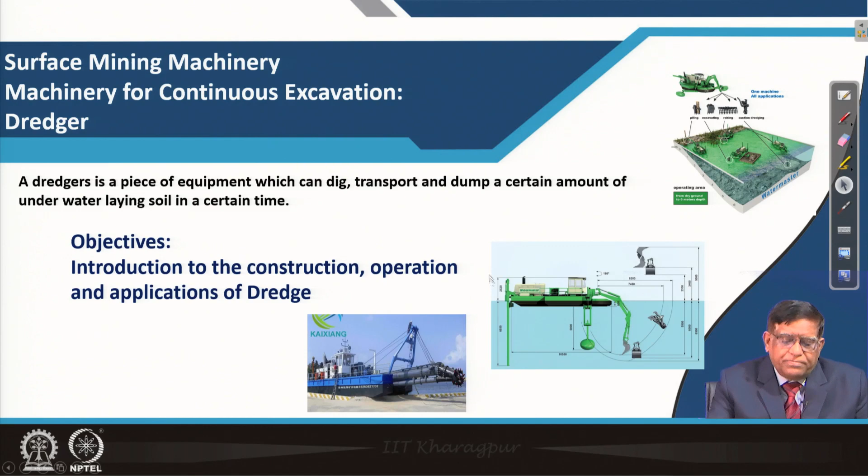These machines were very much used while the Suez Canal was formed at that time. So it is also an old machine used for underwater excavations.

After going through this lecture, you should be able to explain the construction, operation, and maintenance aspects of these dredge machines, and also identify the applicability - where you apply them, for what purposes, and what are the advantages and disadvantages of different types of dredge you can discuss.

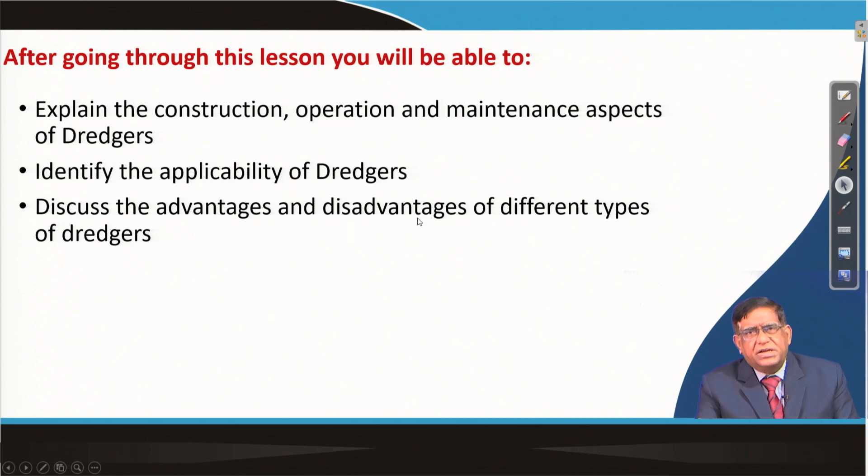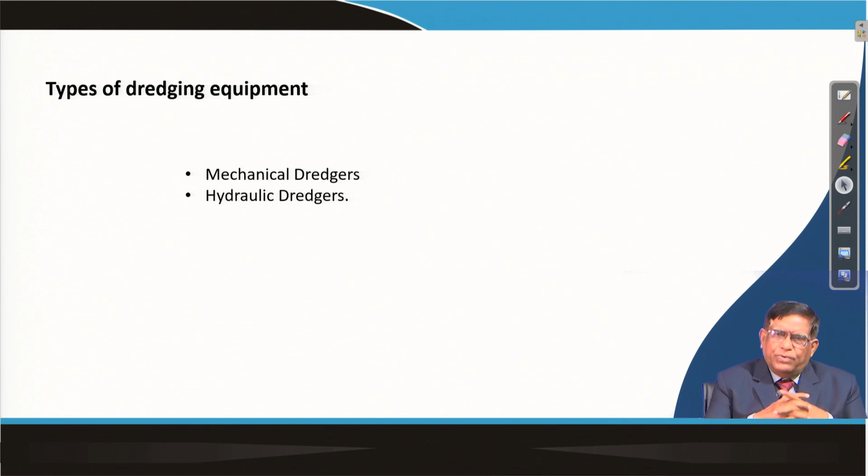So with these objectives, let us see - if you talk about the types of this dredging machine, there are two main types: one is the mechanical dredger, another is the hydraulic dredger. Now if you think of this mechanical dredger, it has got the bucket ladder dredge, or it has got the grab dredge and dipper and backhoe dredge.

The photograph which I showed in the first slide is a backhoe dredge, or it can be a grab dredge. Sometimes grab bucket excavators are used in this type, even for ship unloading they use this type of machine. And this bucket ladder dredge is similar to the bucket chain excavator we have studied - that can be used here too.

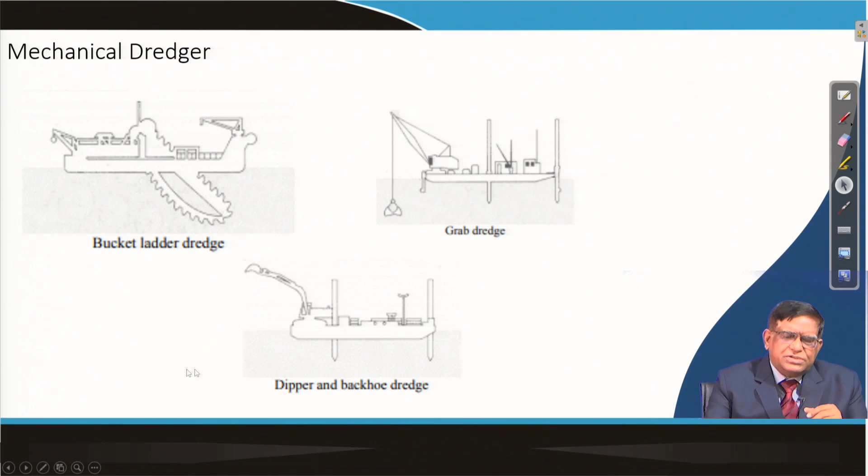But in dredging operations, many of them use the hydraulic dredge. This hydraulic dredge can be a plain suction dredge - from below underwater, the material is exactly sucked through this, and then through a pipeline as a slurry form, it is taken over there. From the slurry, you can separate the solid part by filtering, and the liquid part can be removed. There is also a suction hopper dredge on a ship, where the dredging units are attached. There is a cutter dredge, which is very commonly used - they have got a cutter head suction dredge.

Now these hydraulic dredges include dredging equipment that makes use of centrifugal pumps. If it is a slurry which is to be sucked, the pumping from the bottom is done by centrifugal pumps, and then the material will be transported through a pipeline.

So there is a cutter suction dredge, exactly called a hydraulic dredge. They are in a mechanical hydraulic category of machines, and they have the capability of cutting all types of soils - sand, clay, or rock - because the cutter head will be mechanically loosening the rock.

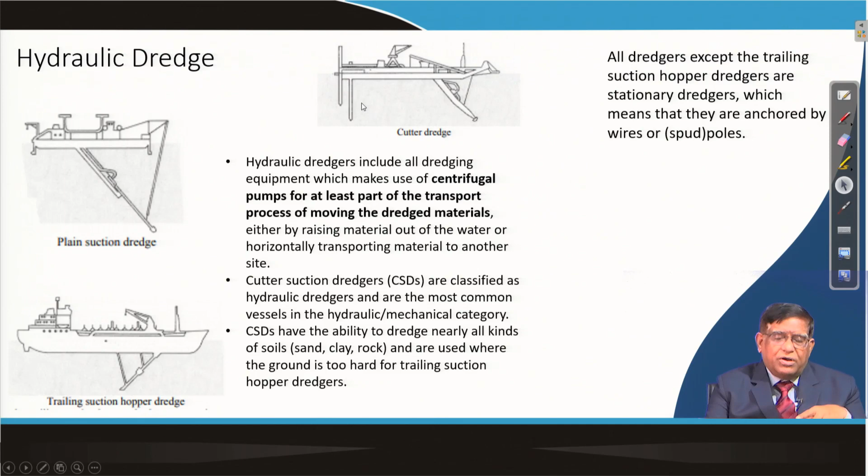There are different types of these dredgers available. These photographs give you a picture of how you can see a ship on which you are having a ladder, and at the bottom of it we have the cutting head. This cutting head will be loosening the rock mass, and the ladder can swing between this range - that means this much part it will be cutting.

There is a spud by which it will be anchored, so this machine during cutting is stationary. After that, whatever the reach of this can exactly be, this ladder can move this way and that way, and it can give rotation this way and that way. So by standing in one position it can cut one block.

After that block is cut, the spuds will be removed, and then the ship will be moving forward and cut like that. This cut material will be pumped and brought to the barge, where there will be a filter unit where the material will be filtered.

There is a crane for maintenance and other operations going on. So that's exactly how a dredge or dredging machine works. This operation is not real surface mining, it is underwater mining, but definitely it is not underground mining. That is why this machinery is kept under the category of continuous surface mining machinery.

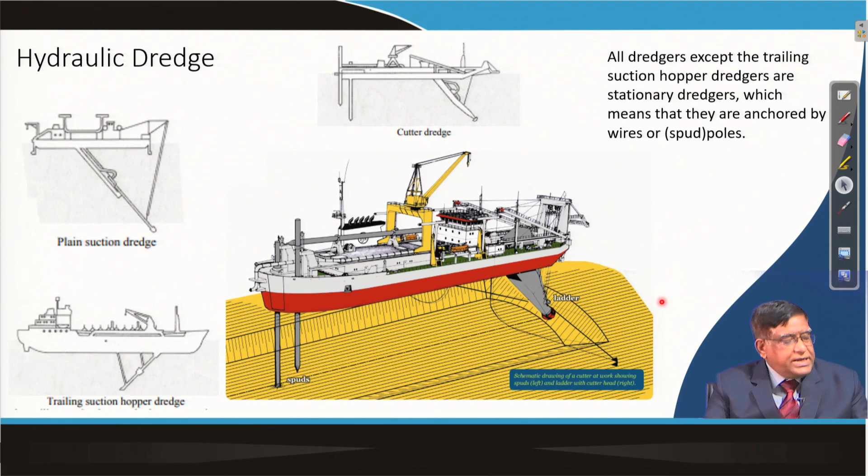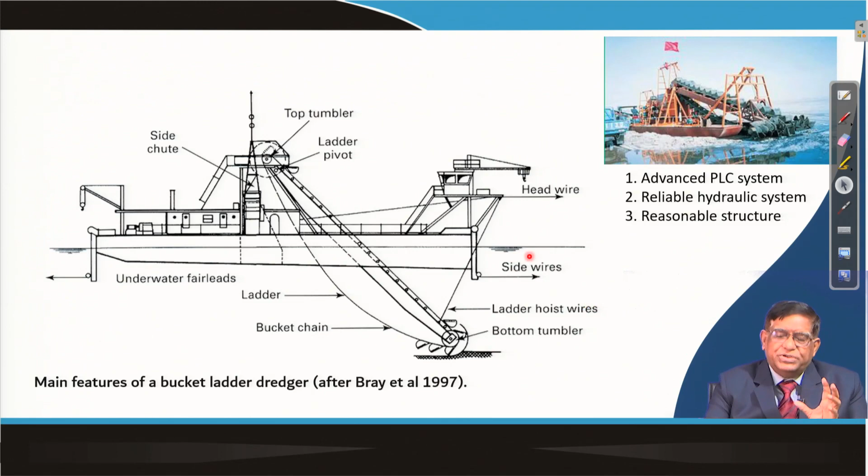Now, constructionally, these machines also have a mining system. As you have seen, it will have a ladder and a cutter head that will be doing the mining operations, and depending on the type of mineral, how they will be cutting, you will have to select the equipment, and there the mine selecting means you will have to separate it out.

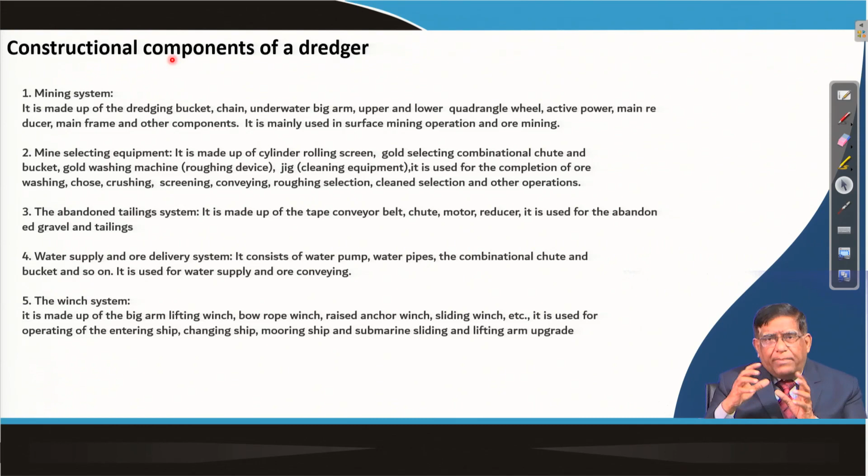After the cut material is brought to the ship where this dredge is, you may require to crush and grind it so that really the gold or copper that is there can be found, because they will be mixing in somewhere, hiding in between some rock. So you will have to crush and grind, then beneficiate - that is, remove the gangue material - and then the main mineralized particle will be poured and stored, and can be transported to another ship or barge that will take the material to the shore, or wherever it will have to be used.

Now, the tailings - that means on that ship itself, when you are dredging the material, say mainly in the South Pacific Ocean, you have got a lot of shallow depth, and also there are a lot of copper and gold rich seabeds there.

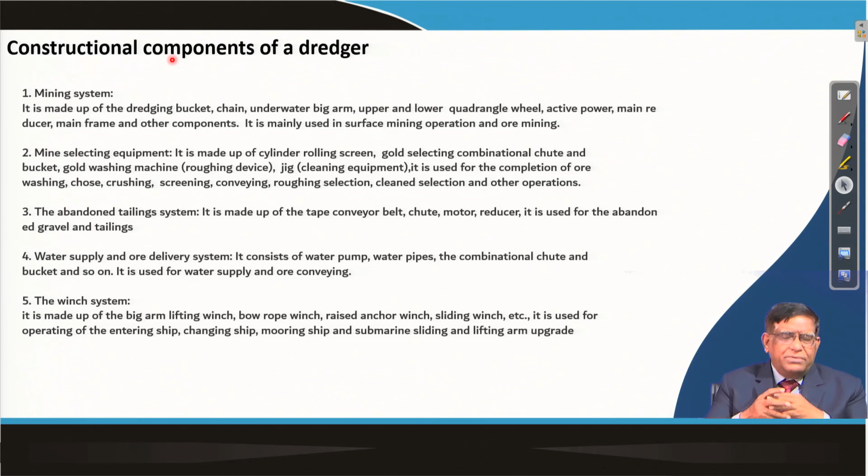There the seabed mining is done by this type of dredging, and then when they process it, sometimes for separating the gold, you may use cyanide or mercury, and those contaminated things along with the tailings, their disposal is a big problem. Sometimes they can be stored and taken out somewhere, or they will just be discarded into the sea. For discarding, there will have to be a chute, or a small short conveyor belt, or through a slurry pump through a pipe it will be transported. So depending on the situation, the components of that system will have to be there.

Now, there will also be water taken from underwater, and they will make it into slurry form, and then it will be moving. After the deslurrification, that water will again be discarded over there. Then there will also be, in the machine, some winch systems. That winch will control the raising and lowering of the ladder, and also the ship mooring operations, many times that will be there. That is why in the machines you have seen there will be an overhead crane also, so that maintenance and other movement can be done.

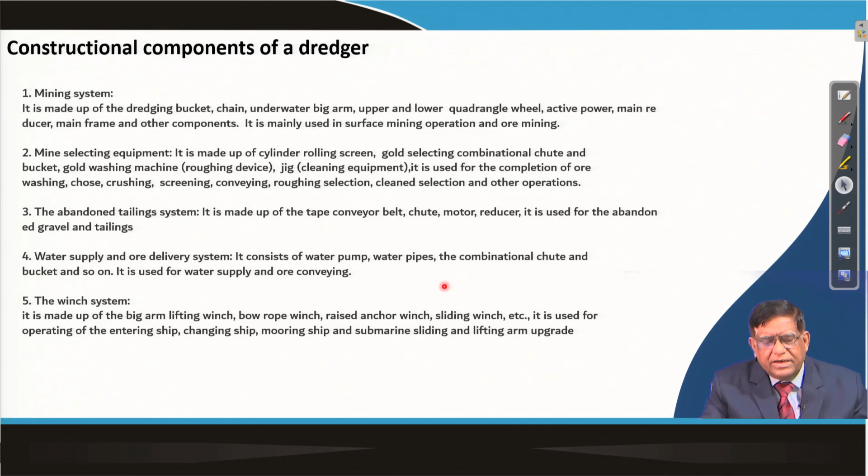Now let us see in this type of bucket ladder dredge how the components are. The main bucket ladder, this is the ladder on which the chain is there, on which the buckets are mounted. These buckets are cutting and then carrying the material over here. Now you can see the next component, a hoisting and lowering mechanism for the bucket ladder. This bucket ladder is hoisted and lowered by either a rope winch or hydraulic systems.

Then there is a drive for the hoisting and lowering system. That means this hoisting and lowering will have to be done by a drive, whether you take the power from an electric motor or from diesel engines. About 110 to 170 HP diesel engines will have to be here. From there you make the whole bucket raise and lower.

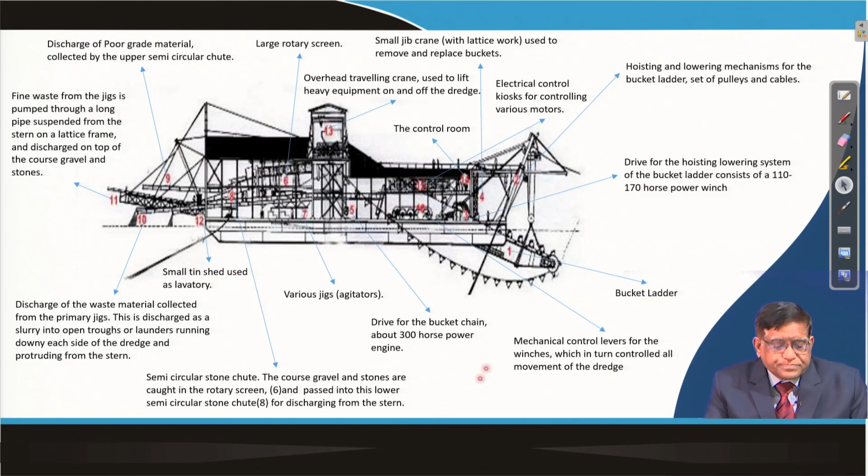Then there will be a small crane here, so that for bucket replacement, they can take out the bucket and put it somewhere, for maintenance purposes. A crane operation is there, and there is a control room which will be working over here. Then there is a drive for the bucket chain, which will have to be driven. There is a drive motor here which will run the sprocket on which this chain will be moving, collecting and transporting the material.

And then for the processing purposes, there are different jigs in the machine itself, so that the mineral can be processed over there. There is also a large rotary screen by which this mineral processing will be carried out. There is also one overhead crane here for heavy equipment lifting and other purposes. And then you can see there is a stone chute by which the material will be loaded for the discharge purposes.

So for the discharge, the waste material is collected from these jigs, and then it will be exactly discarded to the sea, or it can be taken out away from there. These are the things where you can see the discharge of the material taking place. And the fine waste of the jig is also pumped through a long pipe, which is also given over here. So thus this machine has got various components.

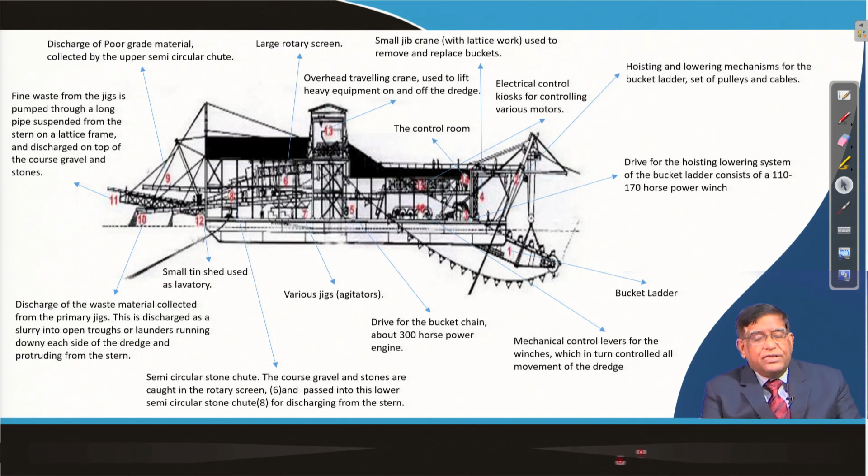So in this suction dredger, a mixture of solid and water is passed through a solid handling centrifugal pump. That pump is a special pump which is also called a slurry pump, and they have to take care that its impeller and blades should not get worn out by the chips, and also that the environment should not be acidic.

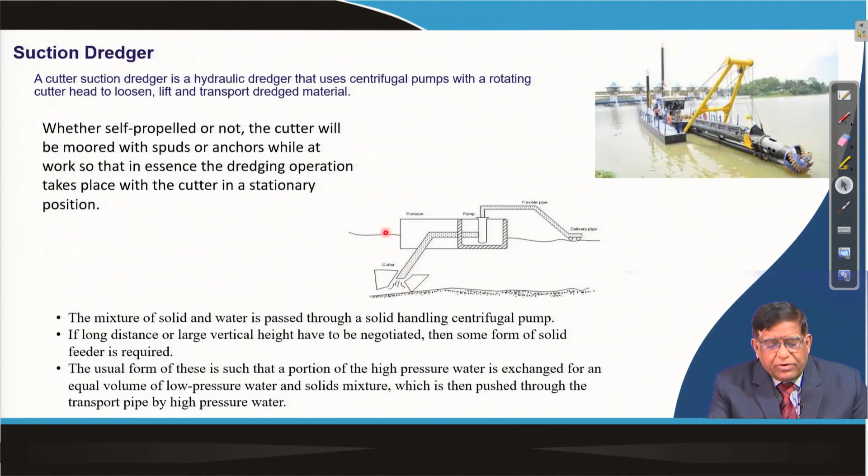If the pH value of the water goes low when making slurry from certain rocks, then pump maintenance will be a big problem. So these things are seen, and exactly how much it will be lifted depends on the depth, and we will have to design the system accordingly. That is very important.

Dredging in hard soil will cause wear and tear, so the cutter head needs to be replaced regularly. Mind it, under such conditions, this replacement and maintenance is a very skilled job, so that is exactly where you need to learn and study.

If you are thinking of working here, for example, Indian Rare Earths has a number of dredges. If you have interest in these machines, you can get job opportunities in the Port Trust of India, since dredging is also required for maintaining the ports.

Other than that, there were some dredgers. One was purchased for dredging the Brahmaputra river for flood management, but they could not use it, so ultimately it was sent to the Kutch coastal area for coastal preparations. This has tremendous use in our country if we think of river linking and river navigation, where river bed management and maintenance through dredging will be very much necessary.

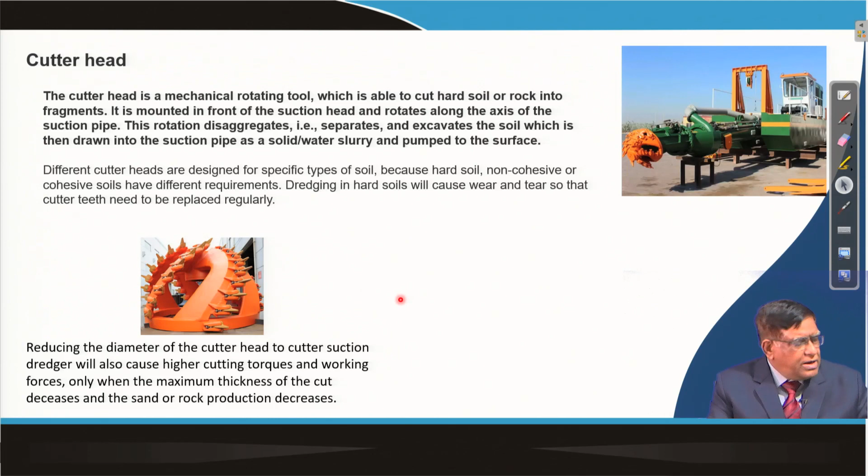In sand mining, some smaller versions of these machines are working, but what you need to know is that the cutter head speed and the pump capacity will depend on the cutter diameter. So if you want to optimize performance on these machines, these parameters need to be correlated. That is a separate study.

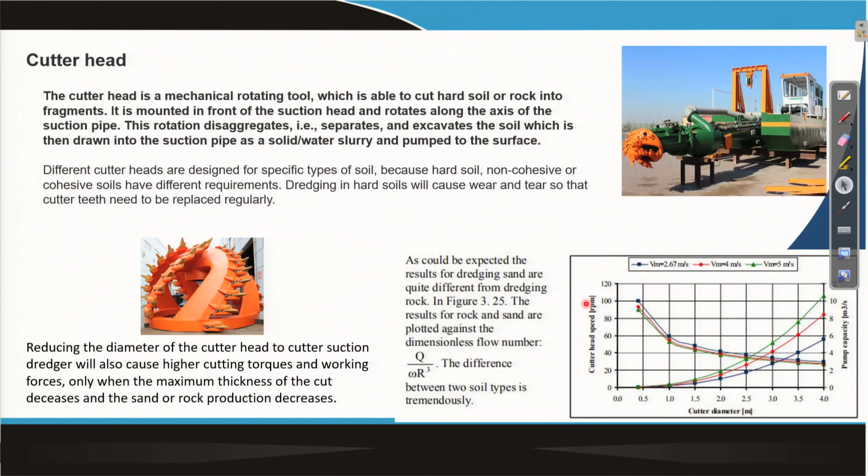If any of you want to take up small mini projects, you can start working on these particular aspects, how to optimize the production capacity by matching the diameter and the pump. Actually, that is one area where a lot of work and research is carried out.

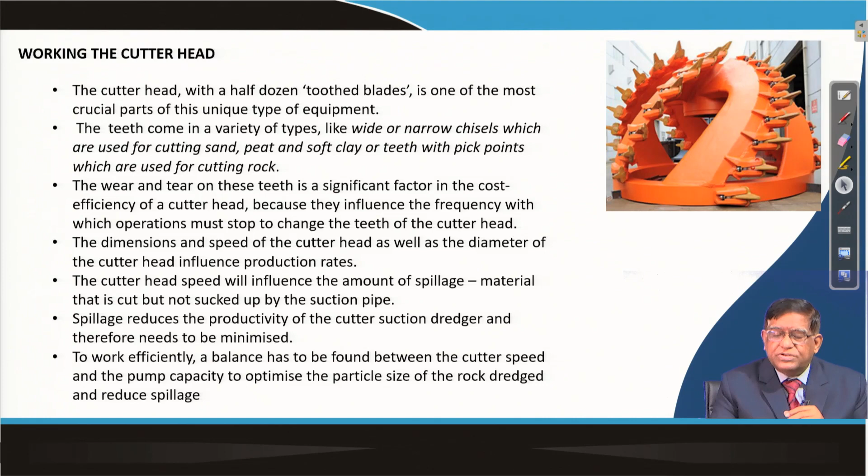Now, how does the cutter head exactly work? It has toothed blades, sometimes called toothed blades, picks, or cutting edges. These need to be replaced and maintained.

It is just like a chisel type of bit, so it can cut sand, peat, or soft clay teeth. If very hard rock comes, they get damaged. Then the wear and tear of this teeth is a significant factor in the cost efficiency of the cutter head. If the teeth fail very frequently, your downtime increases, productivity decreases, and cost of operations increases.

So that is why you have to be very careful in selecting the dimension and speed of the cutter head, as well as the diameter, since these influence production rates. Now, how does it do this?

It can be easily studied by first making a mathematical model of it, and then, if anyone is interested, you can make a physical model and do an experimental study of how a cutter head will perform. A small scale design can be made in the laboratory, and similar things can be fabricated and produced.

That type of attempt must come out from young engineers like you.

Now, the cutter head speed will influence the amount of spillage. What should be the spacing, and how will spillage take place? Material will go out and not reach the pumping area, it will not get pumped, it will spill out. So how will you control that? To do that control, how will the data be collected from there? Nowadays, everybody talks of machine learning and artificial intelligence.

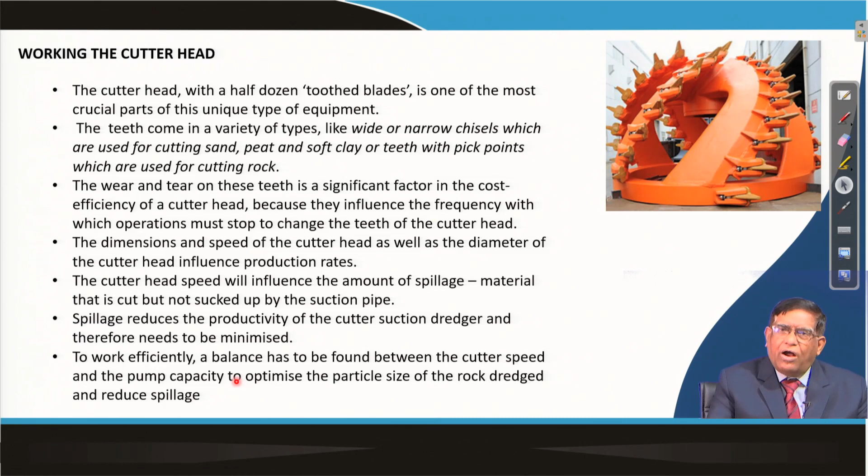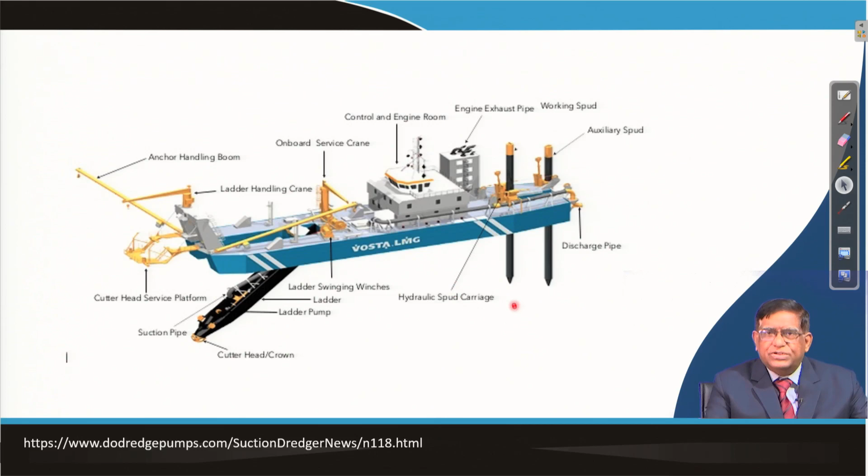Now you can see this type of machine where it is working, the cutter head services. I have shown you this machine in real life, you can imagine how the machine works with this figure. Now, cutter suction dredgers - the working principle is that it disintegrates or breaks the cohesion of the soil to be dredged mechanically by a rotating cutter head.

There, exactly, is the principle in rock mechanics - you have studied about rock properties, but how the dynamics of rock cutting works and how this will be breaking - that is exactly where the design of how you will be fixing the different cutters onto the cutting head comes in.

This is a very important study. The suction tube and the cutter head are attached to the so-called ladder. With the ladder, the cutter head is positioned at the fore of the vessel. In the front, you can place it.

Now, how do operations begin? The ladder is lowered under the water, then the pumps are started and the cutter head is set into motion. This is the sequence of working, and then the ladder will be lowered down until it touches the sea bed or the underwater bed where you want to do the cutting.

Then it reaches the maximum depth. This ladder length could depend on how your pump is designed. Sometimes if one pump does not suffice, you will have to have a booster pump, and that ladder length can be made flexible or telescopic, so that you can work at an undulated bathymetry of the river bed.

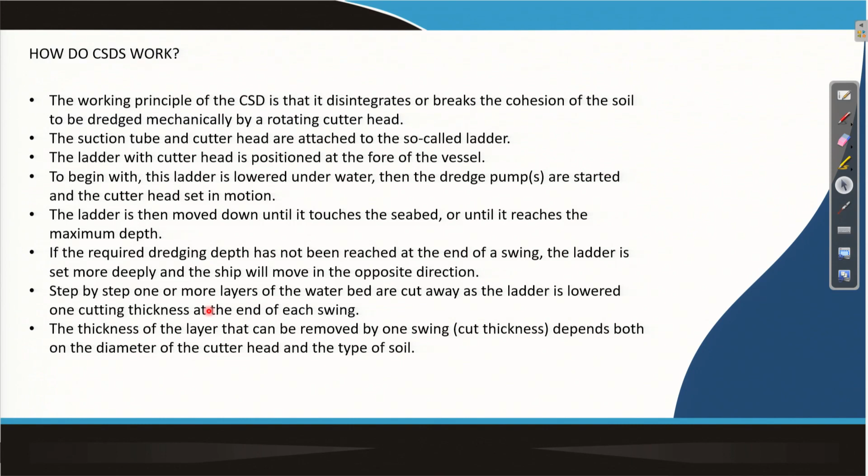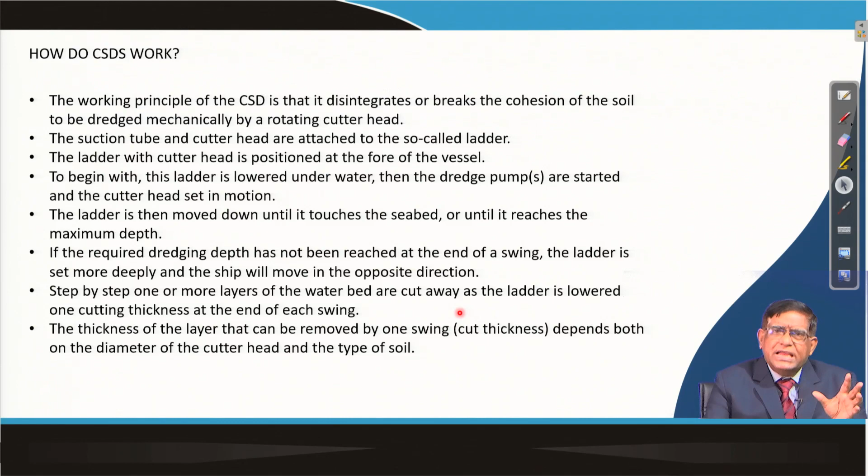It will be swinging down from right to left, and also it will be lowered, and then the angle of the ladder with the ship will be controlled, so you can reach particular measurements. The thickness of the layer that can be removed by one swing depends on both the diameter of the cutter head and the type of soil. The machine parameters and site conditions need to be matched here.

Depending on the type of material, you will have to select the cutter head. Different cutter heads are designed for different types of soil - for hard soil, non-cohesive soil, cohesive soil, they have different requirements. For hard soil, the cutter head should be used so that it can withstand the impact forces on its teeth, because with hard rock the impact will be more, and you will have to withstand that.

It should be heavy, but have a small contour with replaceable teeth, so that it can withstand extreme wear on both the cutter head itself and on the teeth. So it should be a replaceable design. Then, often more teeth are used for hard soil, and good, accurate tooth positioning is necessary.

That is a more number of closely spaced, sometimes of shorter height teeth, that is exactly the requirement in hard material. But for non-cohesive material, where it can be easily loosened, the number of teeth may be less, and the length may be more.

You need to ensure that while cutting, the cut material should not block. This is important because if you are making more rotation, the cutting rate becomes more than the sucking rate, and then there will be a blocking type of situation, or there will be loss of material which is not cut. These are the things that need to be considered while selecting.

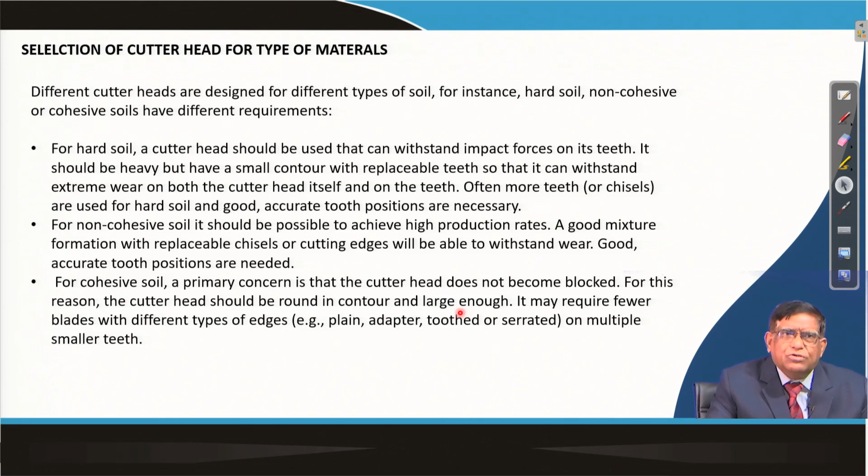Now, how does the material get transported? The material dredged by the cutter is usually transported hydraulically through the pipeline. That is, it is a slurry transport, simply a slurry transport. We may discuss a little bit of slurry transport in transportation machinery.

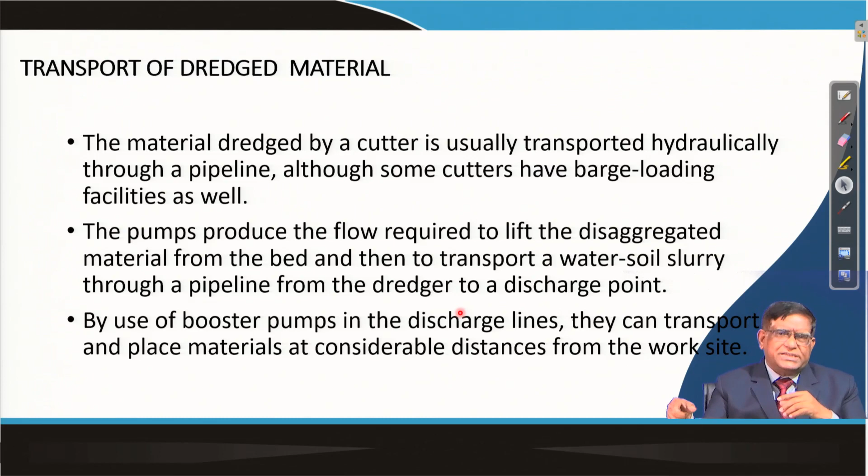After taking it as a slurry form, it will be loaded onto the barge, but before that it may undergo filtering, where the water part is removed and the residue is loaded into a barge. After that, the barge can carry the material wherever required. Sometimes a booster pump is required - that means if the distance or height or head required is more, the same pump near your cutter head may not work, so you may have to get a booster pump.

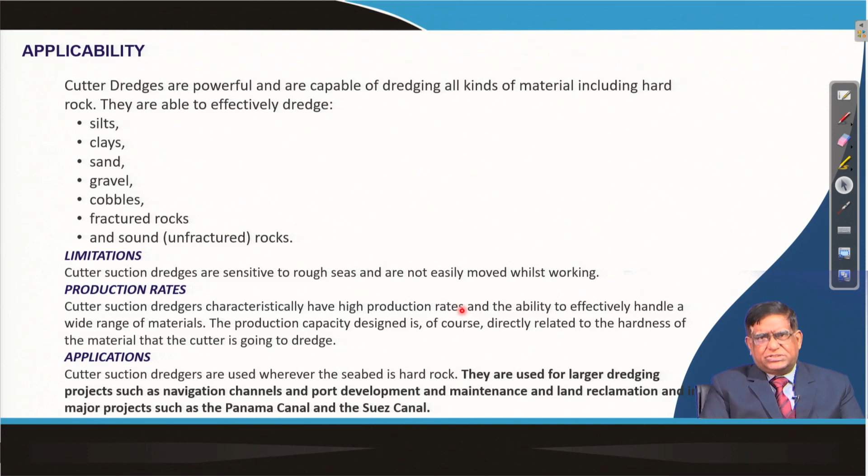As said, silt, clay, gravel, sand, fractured rock - all these things can be dredged by this method. Many times some pond clearing can also be done, but nowadays dredges are being used for sand mining very much.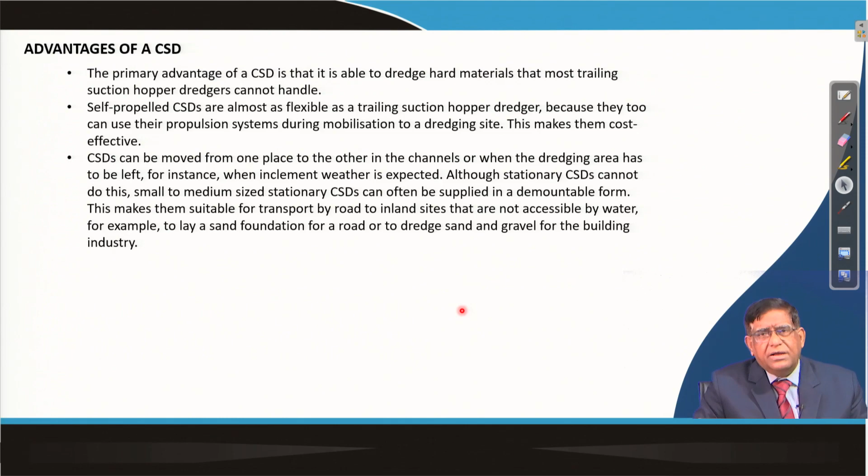This machine can work under different conditions, and if you are judiciously using it with technological knowledge and know-how, following the designed parameters properly and referring to the manufacturer manual, there should not be trouble. But there is a possibility of how condition-based maintenance and reliability-based maintenance can be brought into it, and how total productivity and economics of these machines can be improved by applying your knowledge input.

This is very important - this machine, the cutter suction dredges, has an advantage in that it can work in hard materials, where most trailing suction hopper dredges cannot handle, it can do it.

These self-propelled machines have their own drive - as a ship it will be moving, but while it is working it will be kept stationary. Because it has self-propulsive systems, your cost can be advantageous, and it can move from one place to another, so a whole area can be mined with its help. The transportation cost will not be as much as in surface mounted machines, because of heavy weight transport being more, but in waterborne machines the transportation fuel cost is comparatively less.

This machine requires anchoring, and because of the anchoring there are certain issues, also with sea waves - how it will be affecting and interacting with other vehicular movements. These are some of the disadvantages that will come.

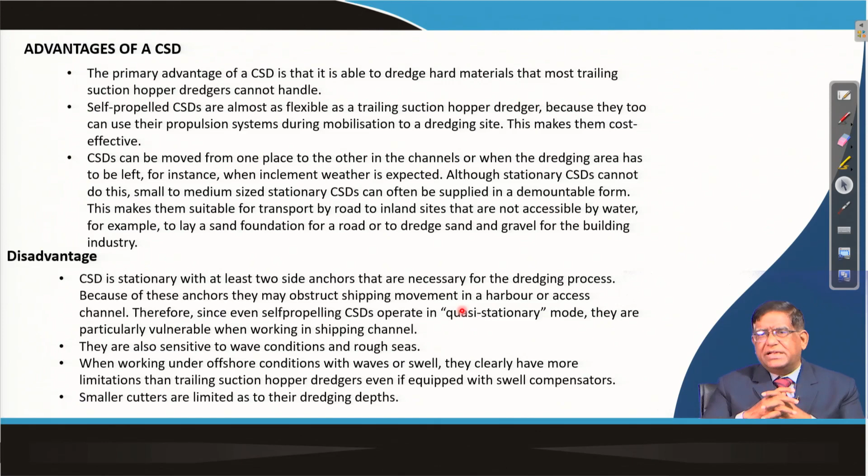Overall this machine has utility, particularly in our coastal areas, in sand mining areas, and also in placer mining - placer deposits of many rare earth minerals can be mined by this.

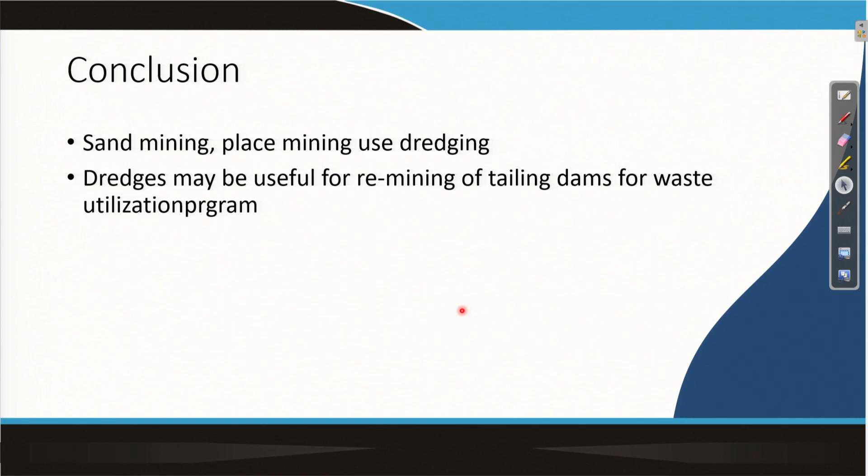Dredgers may also be useful for remining some tailing dams of our iron ore mines, where lean ores are kept, and tailings which contain a good percentage of iron may be there - dredging operations can be useful there.

I hope that you study from the net - there are a number of articles available, and also some application manuals. I request you to see the websites of Indian Rare Earths Limited or the Indian Port Trust, and see how different dredges are used for port management. But as such, for mining in underwater or undersea mining, our country has not developed much, though we have other methods of undersea mining, which some of you can definitely study and develop your expertise in this area. Thank you very much.